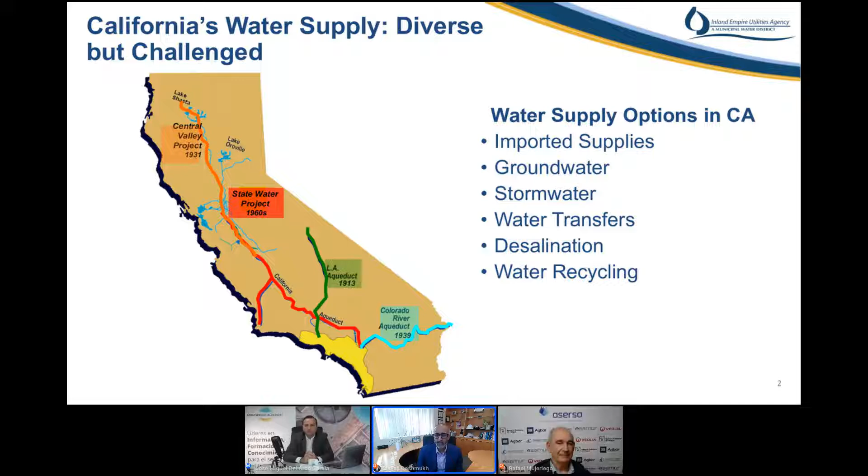Where I work is called the Inland Empire Utilities Agency. As Rafael mentioned, we're an agency responsible for just under 1 million people. We are located about an hour east of the city of Los Angeles. And as you all know, the city of Los Angeles is a very large urban area. Our area is a bit unique in that we have a high amount of agriculture and dairy, so we have a number of farms as well as cows here, which is quite unique in Southern California because it's highly developed. However, we are going through a significant transition over the past 2 decades, converting from agriculture and dairy use over to residential and business.

Affordable housing is a big challenge in Southern California, and with all the new housing opportunities in our area, it really allows and creates opportunities for Southern California residents to be able to live close to their work. We have 7 major cities in our area and just over 600 square kilometers. I want to apologize, I did my best to include metric units, but as you know, in America we still are constrained by some of the English units, which is quite confusing.

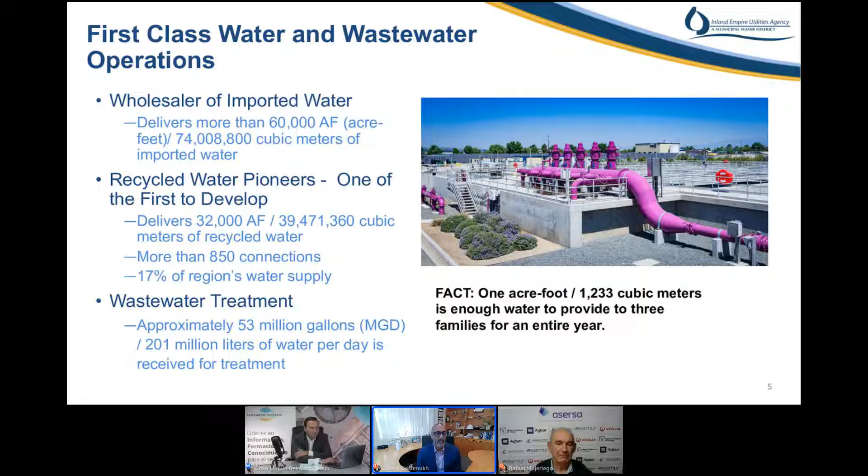You can see on the right here some of our purple pipe - this is a color distinction attributed to recycled water. This approach has been around for 50 years. One of the things we're very proud of in Southern California is we came up with a lot of these concepts and regulations. My colleague Dr. Mujeriego, with his time here, him and his colleagues were really the ones promoting recycled water and allowing it to be used on agriculture and other irrigation needs, which really set Southern California up as the leader in this area.

We are fortunate to have a number of treatment plants throughout our service area. We've identified 5 here, and approximately, in English units, we're about 50 million gallons per day of treatment. But having these decentralized facilities affords us a significant amount of flexibility in terms of rerouting flows, should we need plant maintenance or improvements, and also when we're doing significant construction, we're able to use other plants and their extra capacity to accommodate that.

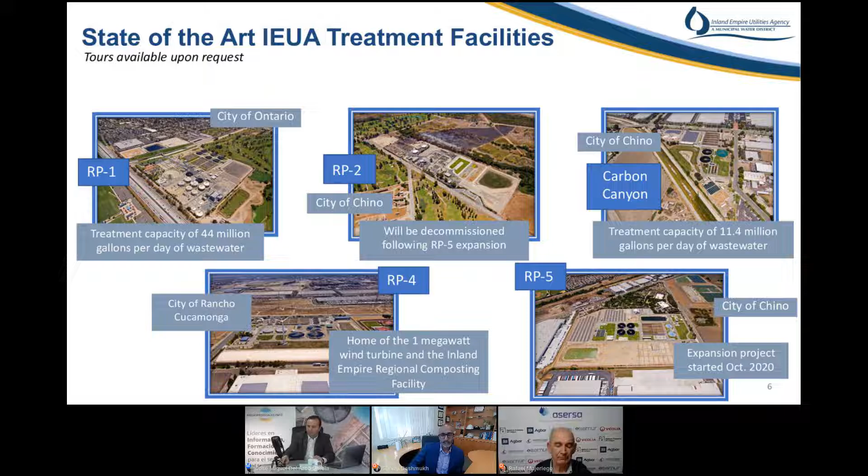That water settles into the groundwater basin simply through gravity. We've been doing this for over 20 years now, quite successfully. We have 18 recharge sites within our service area. Not only does it capture recycled water, but it's able to capture runoff from storms, imported water if it's available, and all of that water gets commingled, gets recharged into the ground, ultimately to be used by our customers in our service area.

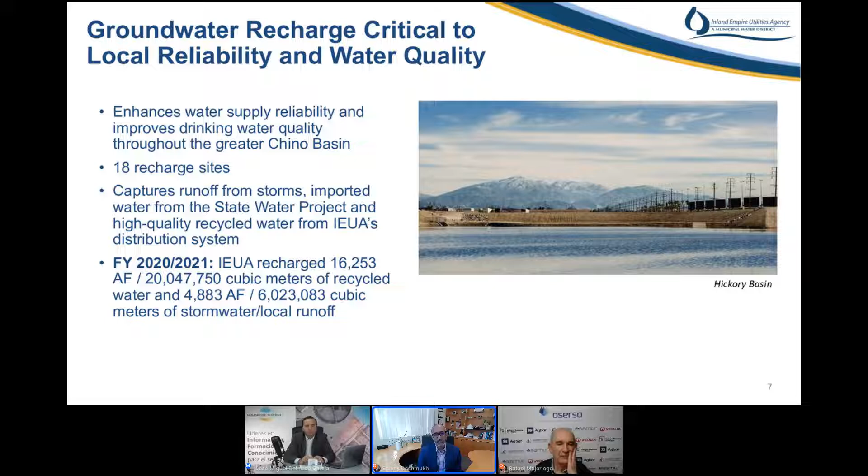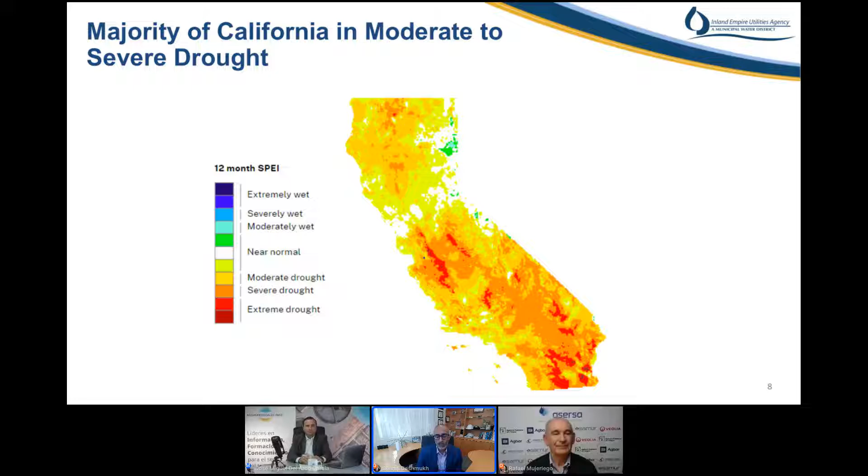Because of this challenging drought in the state system, California as a state had to allocate water supplies to a number of agencies that receive state project water. What that means is for any agency like ours that purchases imported water specifically from the state system, we would be put in an allocation.

Essentially, that means we've been cut off from about 50% of our imported supplies. Fortunately, we have two solutions right now: increasing the amount of outreach and conservation our customers perform, and shifting our demands from imported water to the groundwater basin. But that's a temporary solution, not a sustainable one, as we will continue to draw down our aquifers and put ourselves into greater risk.

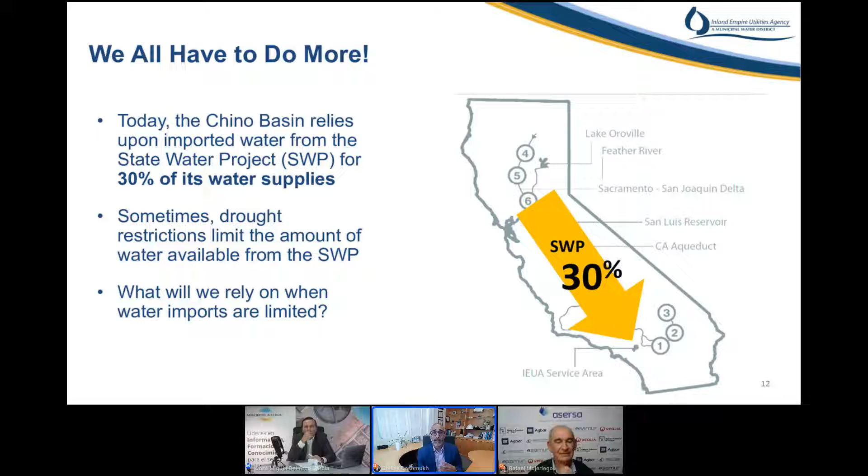So in 2015, we applied for funds to help build some of our projects. What we suggested is that if we built more recycled water projects and got that water into the ground, we could allow the state to keep water in the Feather River in Northern California and protect the salmonid species. So the state and the environment win by having more flows in the north, and then our area can benefit off of a significant financial investment into developing new recycled water.

And currently the state has allocated us $215 million to build our facilities, and we're very grateful for that partnership. This really, if we had that program in place today, we would be able to navigate through the drought and have no impacts to our customers.

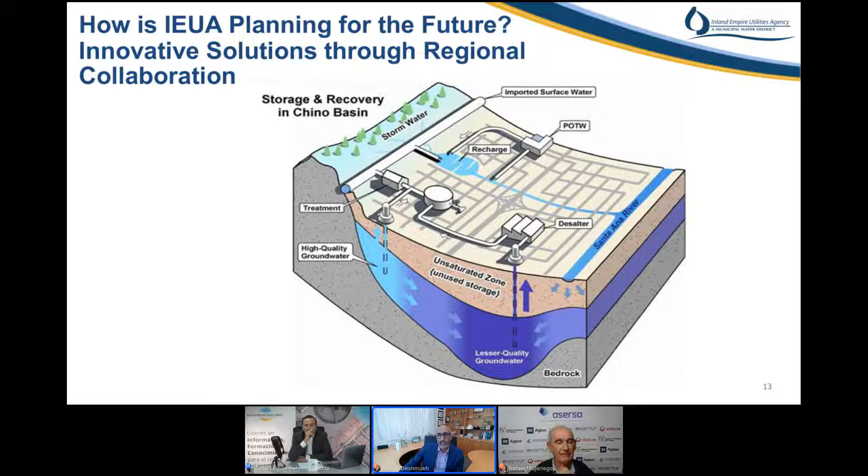So all of this marries up to the project I'm going to be talking about now, which is the Chino Basin program. We do still rely 30% on imported water coming into our area, and basically what the state of California has asked us to do is reduce that, and they'd be willing to give us a certain amount of funding to allow for that investment.

In order to get more of that recycled water in the ground, we do have to apply advanced treatment, which is basically reverse osmosis treatment.

Our partners to the south, Orange County Water District, have been doing this for almost 15 years. Actually, they've been doing it for almost 50 years with Water Factory 21, built in 1975. That was the first time wastewater was treated with reverse osmosis and then injected into the ground. We want to do the same thing in our service area, not to the same size, but about 15 million gallons per day of treatment.

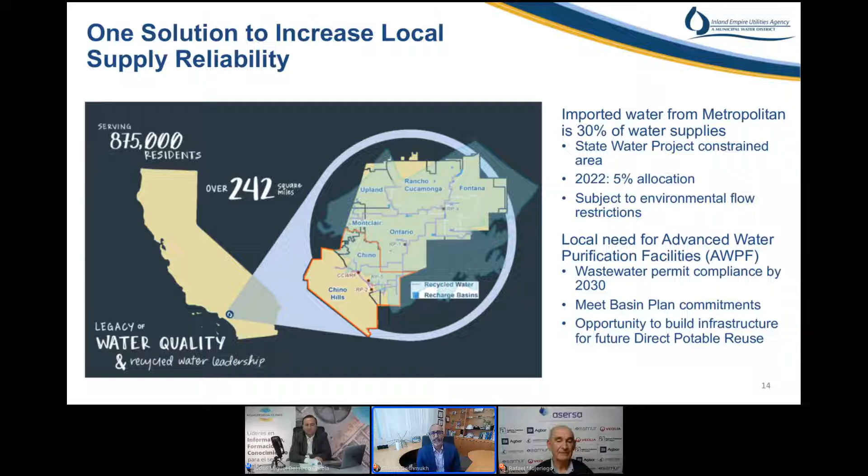So the Chino Basin program includes building 15 million gallons per day of advanced treatment in Southern California. It includes injection wells to get that water into the groundwater basin. It also includes extraction wells so we can pump that water up, as well as pipelines to move it around our service area.

What this does for us is it really increases the local control of our own drought-proof supplies in Southern California, and it allows us to keep more water in the environment, in the river, protecting the habitat for many fish species in Northern California.

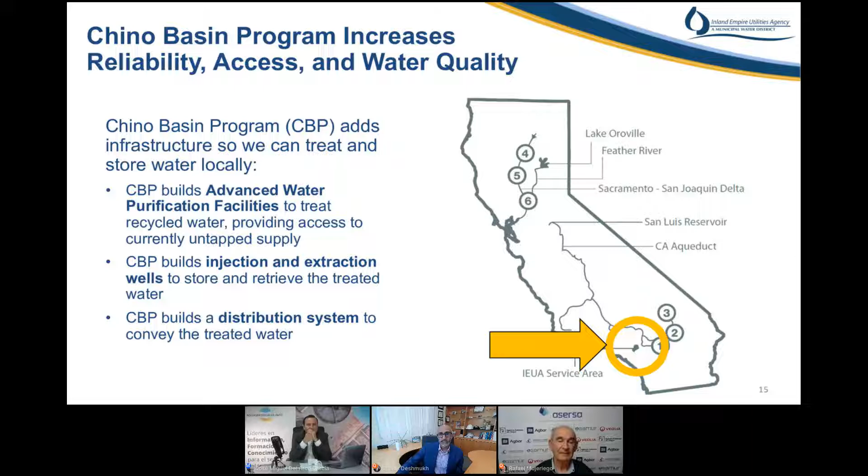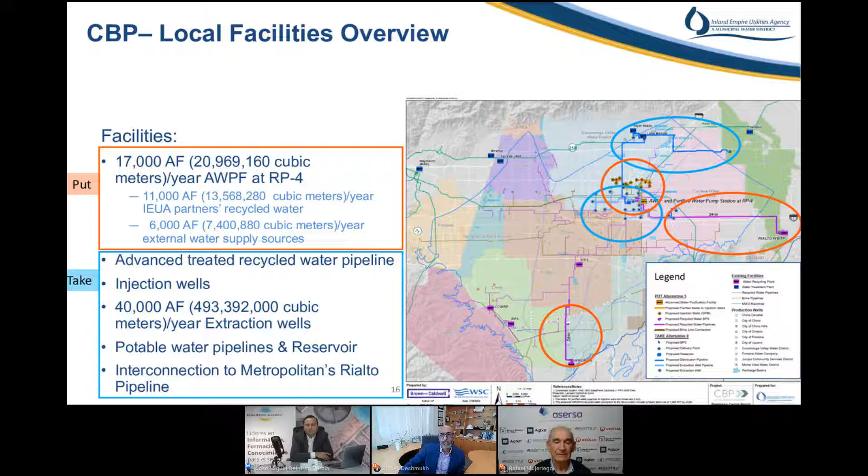That concludes my presentation today. I wanted to close with an update on the program: we continue to plan for this, and have not started construction yet. Our board has to decide in 2023 whether to move forward with this project. We anticipate the total cost will be about $1 billion US, with a quarter of that supported by the state, making it a very important and large financial decision. Because of that, we continue to plan for it and determine the overall cost benefit of the program. After that, we'll provide our recommendations to our board. That concludes my presentation. I'd be happy to answer any questions now.